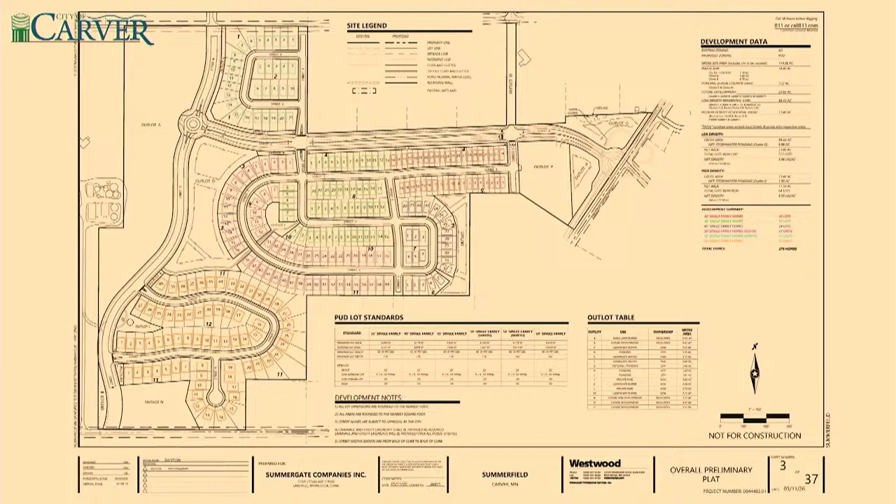On the screen now is the preliminary plat — the technical document showing where the streets are, where the lots are, where the outlots are, etc. There are several outlots throughout the project. The city will be taking ponding outlots primarily, while private parks and landscape buffers will be owned and maintained long-term by the HOA. So we'll be taking outlots for ponding, which is our typical practice, but some other uses will be held by the HOA.

Thinking through the PUD requests they have — the R2 zoning district is shown on top of the screen, and I've highlighted some areas they're requesting additional feedback on. The minimum lot area in the R2 district in our zoning code is 7,000 square feet, the lot width is 60 feet, and the side yard is 7.5 feet. As I mentioned, some of those lots are smaller — that 35-foot lot is obviously inconsistent with the 60-foot lot identified in the city code. The lot minimums have also decreased to allow for medium density on that first parcel as you enter the project. So the PUD request is for the minimum lot area to be reduced, the minimum lot width to be reduced, and the side yard setback reduced to 5 feet on either side.

We've seen that in several projects. Again, River Bluff Estates is a really compatible comparison to this project for lot width, side yard setback, and lot size.

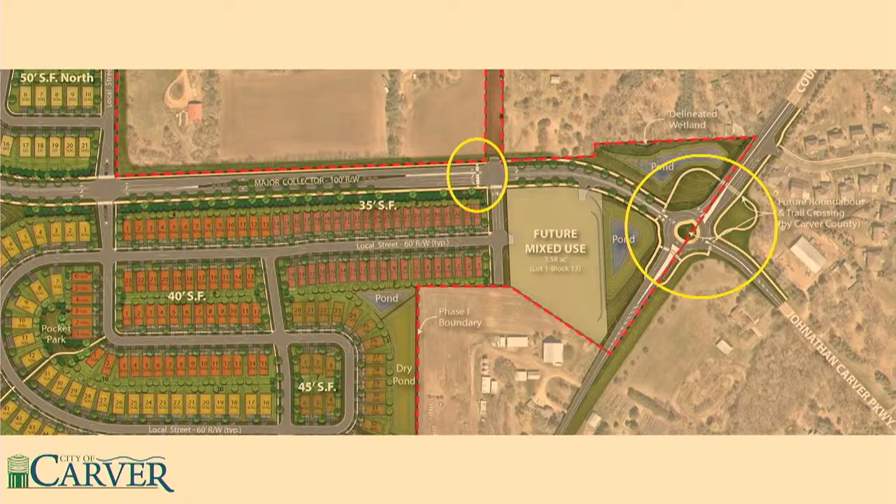Okay, correct, thank you. Now the landscape plan, which we've talked about a lot regarding buffering.

The street that comes in on the roundabout into the project is a collector road, so think about it similarly to Monroe, thinking about how traffic enters the system and travels, along with another east-west collector we'll see. There's extensive buffering along the Lennar lots entering the site, and extensive buffering in this area. This area is held as an outlot for additional buffering from a farm user and ag user that is planning to stay, offering some additional space. Landscaping throughout the development will be long-term maintained by the HOA in some key buffering locations.

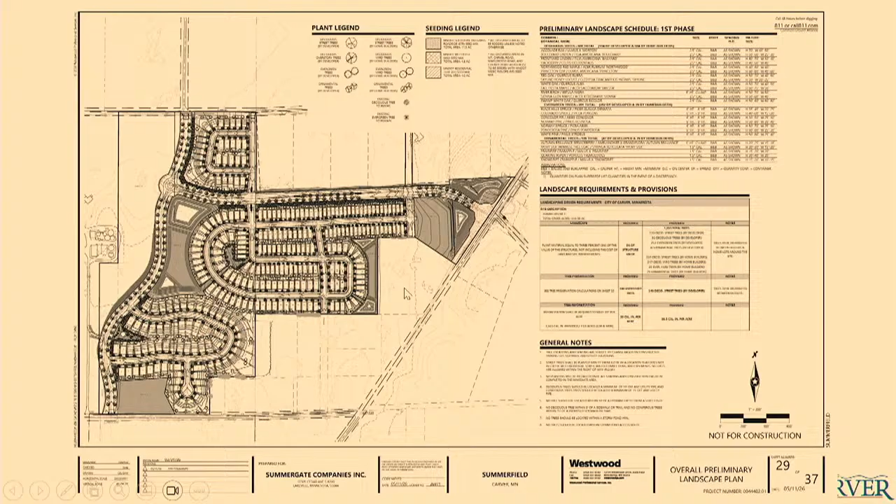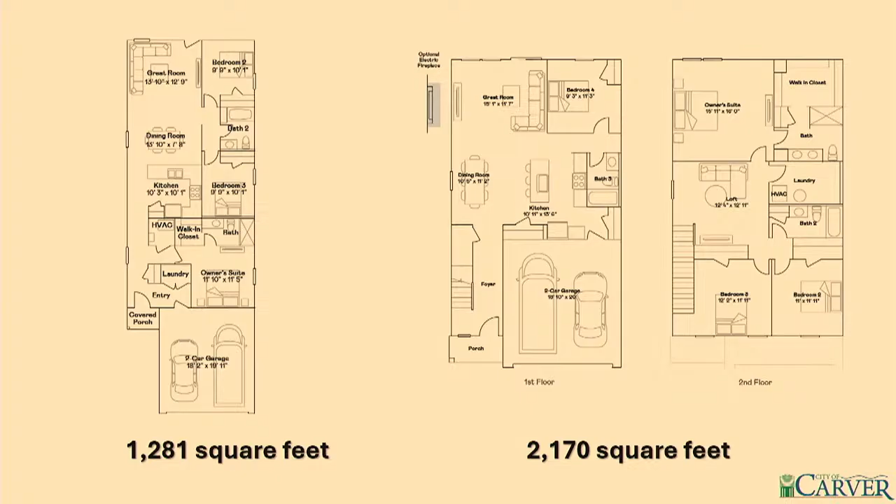Some samples of what the Lennar houses will look like, including that first property coming in that hits the medium density, with some different housing types than what we currently have in Carver. Here's an idea of what some of the interiors will look like. These are slab on grade homes, the smallest ranging about 1,281 square feet, and a larger product at 2,170 square feet—both Lennar products. And then the M/I Homes, very similar to what we've seen in Meadows at Spring Creek, for that development on the north and south portion of the west side of the project.

As previously mentioned, the Planning Commission reviewed this project at their June 18th meeting. We had 8 people at the public hearing, and I want to extend a thank you to them. It can be a little overwhelming to come in and speak at a public hearing, but it was great to get their information and hear what they had to say. It's always great to have a full room learning more about a project, no matter their stance on it—I hope they can always walk away with at least some more information.

So we received some questions throughout about the county road improvements. That was a big piece of it. Folks who have historically lived in this corridor for a long time asked specific questions about how their property will be impacted. Timing of the project was big. Some clarification about what annexation looks like, township versus city boundary, and then drainage, especially at the northeast corner of the project boundary, as you enter the site from that roundabout. We have a slide coming up and I'll toss it to Aaron after this.

I would like to note that the Planning Commission recommended approval of the preliminary plat and rezone on a 5-0 vote.

Yeah, so I just wanted to elaborate a little bit. One of the concerns we heard, which was a really nice comment, is that this project drains off-site, situated at that northeast corner of the development. There's a series of ponds that the water drains through as it moves through the site, and ultimately the discharge location off the property is in this northeast corner.

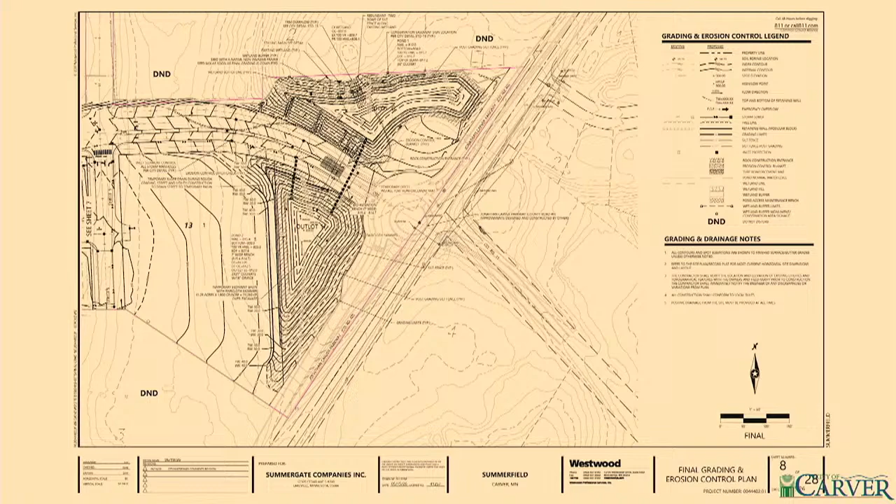Right, so. Thank you. Yep.

So again, tonight there are three requests before you: review of the preliminary plat, rezoning, and then that early development agreement for grading and utility work due to pipe depth. That's so hard to say. Pipe depth. At this point, Casey, do you want to join us for the conversation? Will you introduce yourself?

Hi, good evening everybody. I'm Casey Walschlager with Summergate Development.

Thank you, good evening again. I'm Casey Walschlager with Summergate Development. We're kind of glad to get to this point where we're finally seeing maybe the start of things. The project has a lot of different elements. She brought up a number of them, talking about the different size lots.

One of the things that's really happened with the Met Council is, it used to be where you could have these kind of yellow zones and orange zones, and as long as it all averaged out and met that number, everybody was happy. Then the council changed the plan and said that orange zone, literally down to the inch, will be that zoning, that size lot, or whatever.

They've made it a lot more difficult to use common sense and just make sense of plans, so everybody's changed their philosophy a little bit. Our plan has gone through many iterations over the last couple of years as we've worked with staff. Originally we thought we'd just do townhomes in one section, then we thought maybe we'd average it out, because that was how it was done. Then Met Council changed their philosophy a little bit over the last 18 months, and we reverted back to making sure the medium density area meets medium density qualifications, literally down to that section.

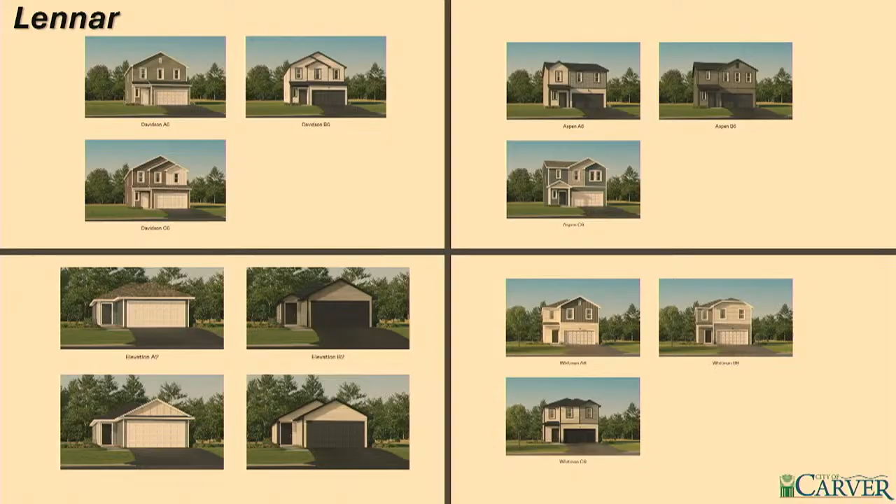There isn't a park nearby, how far do we guess that park is away? Those are really small lots. If we're looking at probably small starting families, is my guess. Possibly, anyone of course, empty nesters could have one also, but it doesn't seem like there's a lot of room to have a pet, have your kids be outside. It just seems really packed in tight.

Even behind the house? So the park is slated to be in this general location here, just further south. Is it this one? Yeah, right below the red stuff. Yeah, right there. So, something to know: there are 2 pocket parks in phase 1, and then the larger park would be served for those folks via a trail system. So a couple things to note, but comment well heard.

So when we're looking at this, is that acceptable to us, to have that small of a backyard? As a development that's going in, are we okay as a council with that, as staff with that? Again, I like the smaller houses, I like the smaller footprints, it just seems really small if you're looking at the length of the house, and then to think about having even any green space out back.

I'm okay with it just because of the variation in product, and this is only one phase. We're not talking about an entire development of 35-foot lots. This is just one piece that offers a product that might come in at a price point that gets somebody to Carver. So I'm okay with that. That is the buyer's choice.

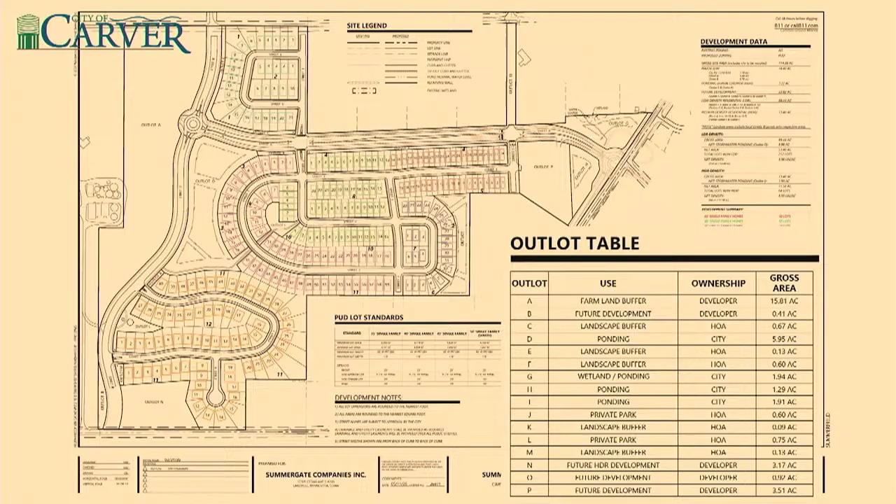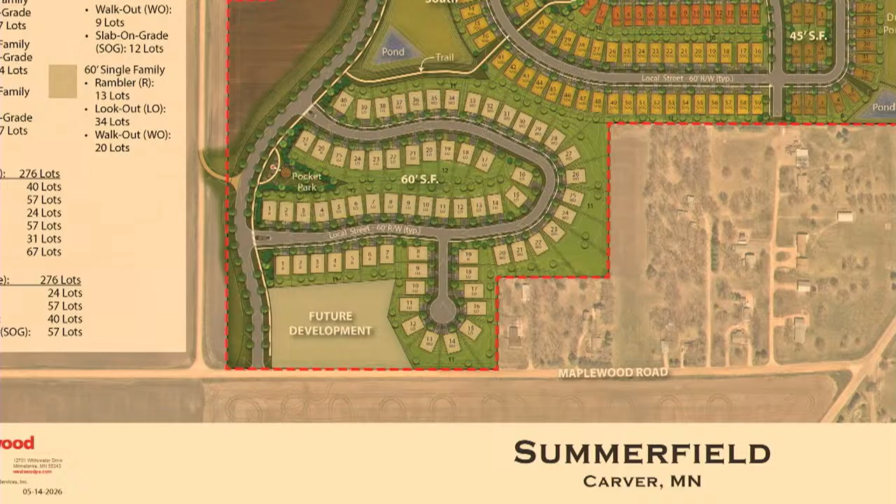So those are the building pads that they're showing, right? So there could be - if you go to the illustrative one, if you wouldn't mind. If you can zoom in, on the bottom cul-de-sac. Can you zoom in at all more, or is that as far as you can?

Okay, so when I'm zoomed down on mine, looking at it - this is a really big sticking point for me because I think we're doing a disservice to the future neighborhood there. We've already seen the complaints, we've already dealt with them on one that we've already done, and it has been nothing but issues. Parking.

I have a different view of it. I'm comfortable with what's in this concept of the plan. Definitely Lorraine Court - we have residents who are now long-term residents, and that's... they've been residents for a long time.

I might pronounce it wrong, but I feel like that cul-de-sac is a bit of an anomaly because I don't hear about it as much on other cul-de-sacs. I feel like it's just a small percentage. It's unfortunate, but there's a unique story in that neighborhood, and in so many of those homes - I live within walking distance, so it's a little different. But as far as how large their family is, what their occupations are, that's playing into the dynamics.

I've also personally parked up there, and there are numerous spots that are not long enough to fit a car length. Then those people shouldn't park there. They need to either double up in the driveway or go for a longer walk. Right, but then it just pushes it, it just keeps pushing it down.

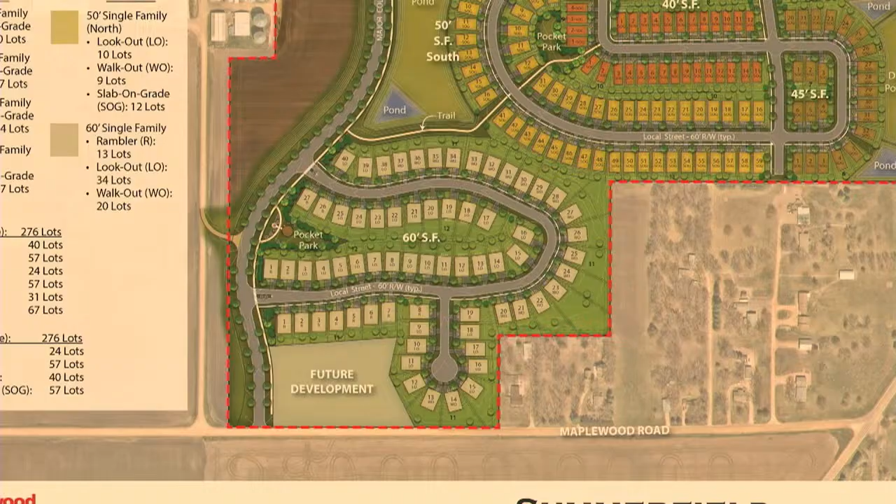So all you're going to do is push it down the street and overflow it in front of the next homes. So you'd be fine on your cul-de-sac or street having all that parking now come directly in front of your house? You'd be okay with that? That's fine with you, only because that's the only option? I don't think so. Just imagine, Lori, if on your quiet street all the parking was pushed out and now it's right in front of your house - would you be just fine with that?

Yeah, even if that might happen with the plan, I wouldn't adjust the plan just because of that. I would be annoyed and inconvenienced by that.

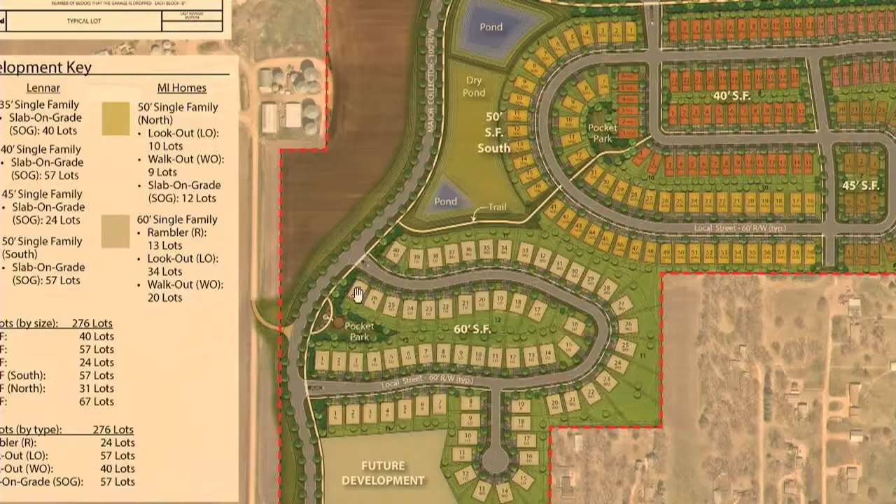It's not always developed. Like we did one once before in a project, and everybody wanted it left woods, and all we had was the trail cutting through it, and it ended up being woods because it created some privacy inside that area. But then you have the woods, so everybody has a trade-off on these things. But there's not a specific great big plan for the pocket parks. They're mostly just to be open space for the kids to play in. I mean, that's how we kind of looked at it.

Thank you. Yep. That it? Yeah. Okay, I was really thinking I was going to come up with another question or something, but just those two. Eric? This is nitpicky.

These kind of things make me nervous, these little islands here. I have this on my street, and if somebody parks right there, no emergency vehicles getting by. Are we making this wide enough so we've taken that into consideration?

All right, 20-foot face to face. We've learned from a previous mistake. Okay, all right, good enough. And Andrew and his team have voiced the same concern for plowing and such, so we'll make sure that's addressed.

Thank you, so nitpicky. Is that little thing needed?

Well, I mean, that's usually like where kids wait for the bus and stuff like that, so I get that. Then there's the beautification aspect for it. They get something for their money for the HOA.

Then yeah, the intention is to put a little monument sign on the common shared space, if it means anything. The intention is to put like little neighborhood monument signs.

Okay, yeah, well, if you hadn't kind of figured out from the design, the idea is to create neighborhoods inside the neighborhood again. So the one we're looking at right now, there's an entrance, kind of the north and the south entrance there, and there'd be some type of monument sign sitting inside that would identify it.

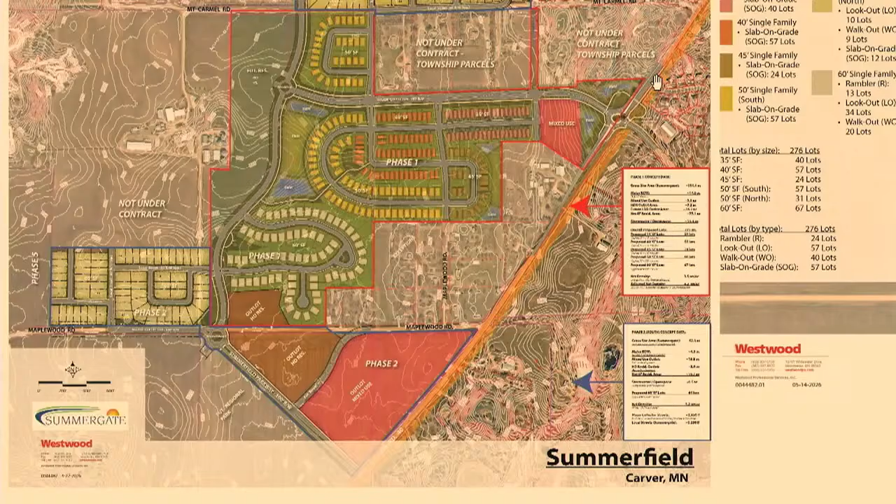Fantastic. I love the housing variety. I think we've all had our own comments on this, but I think that this is a type of house we haven't seen in Carver yet, with kind of the really the smaller sized standalone townhome.

I didn't see any, but are there any private streets in this development? Fantastic. The trails will be city maintained, correct? Okay, except for some spaces that move between like the pocket parks, and I suspect we'll work through that.

All right, that's all I have. I have one more question. You brought up the lower pocket park. So Erin, when I'm looking at this, and I'm looking at the lots, so we've got 5, 6, and 24, 25. Where, if you can zoom in a little bit on that, where that comes to that little point, does it make sense to extend those lots?

Yeah, can you make that any bigger, enlarge it at all? Oh, can you move the hand? Thanks. Just because there's like these little teeny pieces in here that we're going to have to maintain. Does it make sense to just touch those lots completely, like 24 and 6? Is the association going to maintain those?

Sometimes when you see the park, it's one of the things we have to hit open space requirements by, so that's your square footage you need. You can't just fill it in with lots. So, trust me, I buy into what you're saying, but...

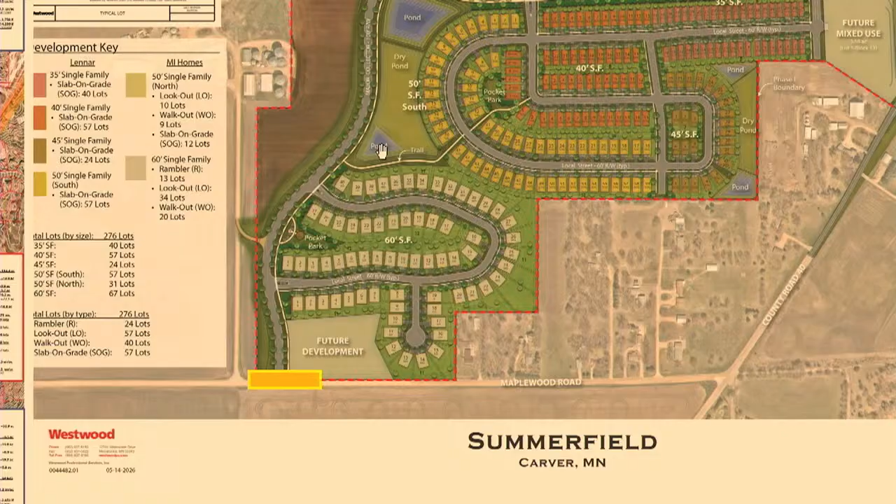All right, we have a few motions we need to do at this point. I'll make a motion to adopt Ordinance 04-2026, rezoning property to R-2 PRD to accommodate a subdivision proposed to be called Summerfield. Motion by Pershman, second by Pasco. Any further discussion? All those in favor say aye. Opposed, same sign. Motion passes.

I'll make a motion to adopt Resolution 136-26, approving preliminary plat for the first phase of a residential development to be known as Summerfield by Summergate. Motion by Sarah, second by Pershman. Any further discussion? All those in favor say aye. Opposed? Motion passes.

I will make a motion to enter into an early start agreement by and between the City of Carver and Tollefson Holdings LLC regarding Summerfield. And I will second that just to get in here. We've got a motion by Pasco and a second by Johnson. Any further discussion? All those in favor say aye. Opposed? Motion passes. Congratulations, Casey.

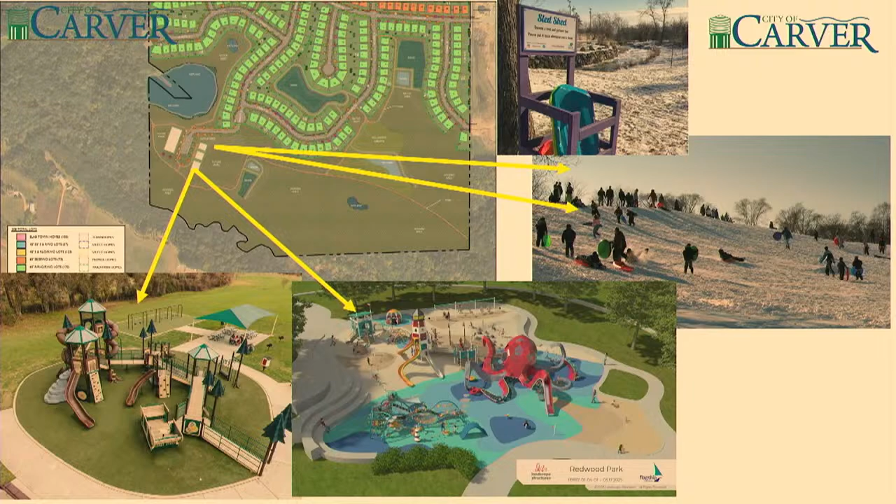Where is that? Is that in Minnesota? It's in Apple Valley. It's big in the mom circles right now. Yeah. Oh, yeah, that's why.

I'm thinking, like the Chutes and Ladders Park. Yeah, exactly. That was hitting some of the high notes that folks were looking for. Again, some different park features, some more reflection space.

So we reviewed that information. I asked, how do you feel about it? Overwhelmingly, people were good with the design of the park. Nothing major coming out to say we need to do XYZ here instead. So that would be the general location, barring any conversation tonight, that will move forward with DR Horton in the enclave.

The next conversation we had was the Summerfield Park. So this is what's included in the Parks Master Plan, again developed in 2018. But as we start to think through it, I think something that we need to have a discussion on at a staff level, Planning Commission, and City Council level, knowing how expensive this park could be, with some priorities that we have outside of the specific parks.

I also personally think that a stadium field is great for a certain number of users, but it's not a super broad use for most folks. Just knowing the amount of maintenance that they can take and some ownership that folks might have, which is great, but a use that 276 families probably couldn't go use on a daily basis if this was their neighborhood park.

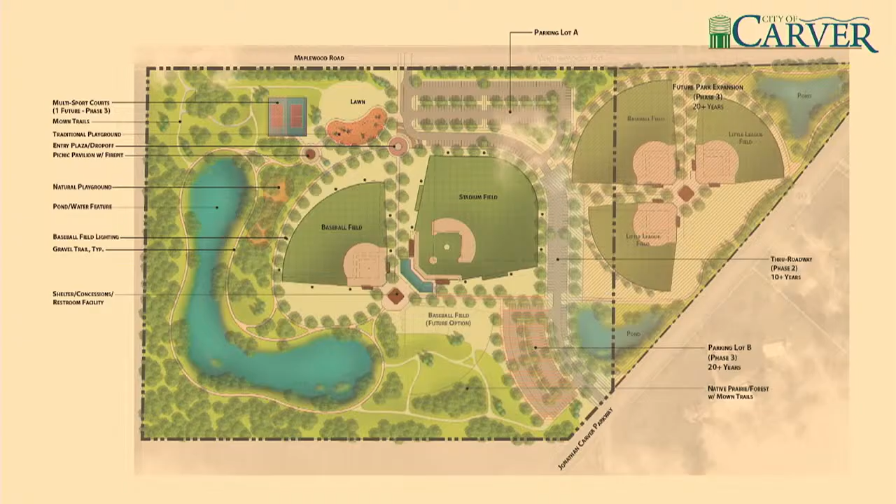But thinking through the acreage of it, it's a huge park. We can work with Summergate and figure out if we want a smaller area reserved. Right now it's 38-ish acres, and that alone at $95,000 per acre is $3.6 million. So thinking through what that does to our park dedication dollars, it's 768 lots. Again, tonight you looked at 276, so essentially taking that by 2.5. So phases 1, 2, and 3, if they were that same size, phases 1, 2, and half of 3 would be just for land acquisition for the Summerfield Park.

And then a stadium level field limits public park use, heavy investment with low engagement use, high maintenance expectations, and it's a lot of money used for parking. Phasing will be important. We don't have to buy into this park straight at 38 acres with those uses. So we also talked about investing in the Summerfield Park with a stadium level field would delay the landing, just knowing how much construction would cost for that level of improvement.

You've all seen this slide at a couple of meetings, talking through what this looks like when you come off the Merriam Junction Trail, a pretty significant commitment and project that was done by Scott County and Carver County.

So thinking through what this looks like for folks who have maybe never been to Carver, this probably isn't the warmest welcome. These are some previous versions we had of the landing, with a large community space, potential stage for performances. I heard overwhelmingly that folks are passionate about good bathrooms here, beyond what we typically offer like a biff or porta potty, and then a water feature adjacent to the levee project.

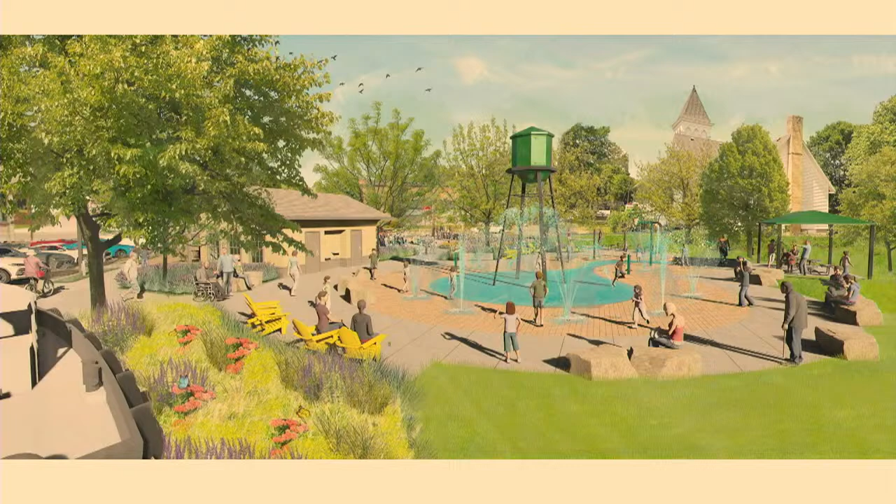So some examples of what that water space would look like, understanding that it's the historic downtown, if it's a water tower feature. We talked a lot at that meeting about what a splash pad is versus a water feature that could be used as an art installation or a space for gathering.

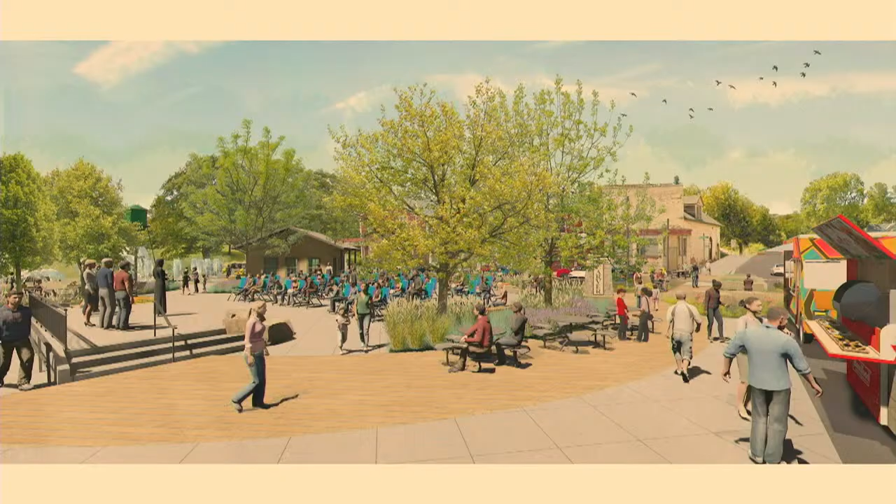Different views. So this would be standing a little bit further east, like Riverside Park would be behind you looking towards Getaway, so this is the Getaway building. Space for food trucks, casual seating, the performance space, and then a community pavilion.

The entrance into the park, pulling some of our common themes from the JCP project with that monumentation and plantings. This was shown at your strategic plan.

This was a version we talked about again at the strategic plan with the Merriam Junction Trail. A lot of these themes come through in the plan we have, so looking for some additional feedback if this is the continued direction—pavilion space, stage space, water feature that could be used throughout the day and night in the downtown.

Again, general layout. I wanted to revisit the previous version that just mostly featured the water feature. Throughout the park we've made some pretty significant changes—the water feature gets pulled back, becomes less of a focal point with some additional uses. So version 1, version like 8 probably, but just wanting to show the conversation we've had articulated in the plans.

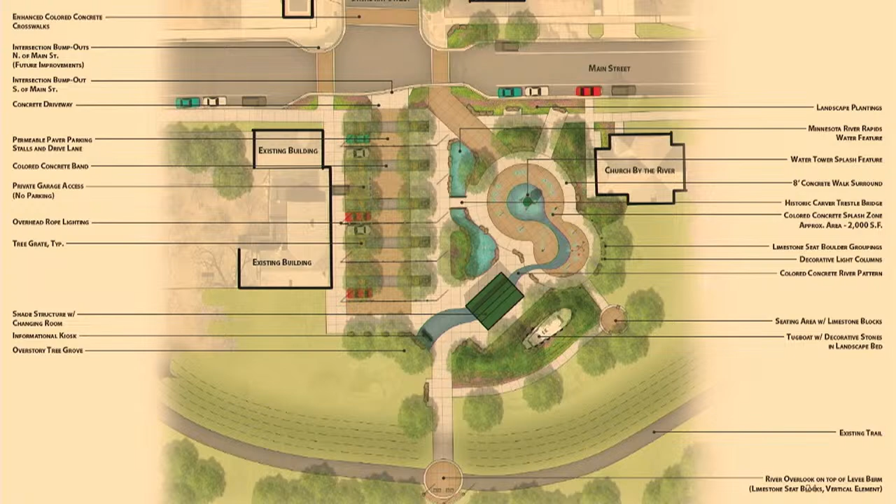Yeah, the importance of opening up the bridge with a connection to downtown. So we talked a lot about what needs to change about the landing. We've seen a lot of versions of the plan. This was probably version one that got routed, and it did look like it was only a water feature, or what folks were calling a splash pad, which I can understand. But looking at what we've changed in the plan, it checks some more of the boxes folks are looking for — the food truck space, some casual seating downtown.

The farmer's market, if it continues, would move to this space in the parking lot with some cute lighting, etc. So the conversation was had too of what do we need to change about the landing. Overwhelmingly, it was about how we talk about it and think about it as a community gathering space, as opposed to a splash pad water feature — offering some additional uses there coming off the Merriam Junction Trail.

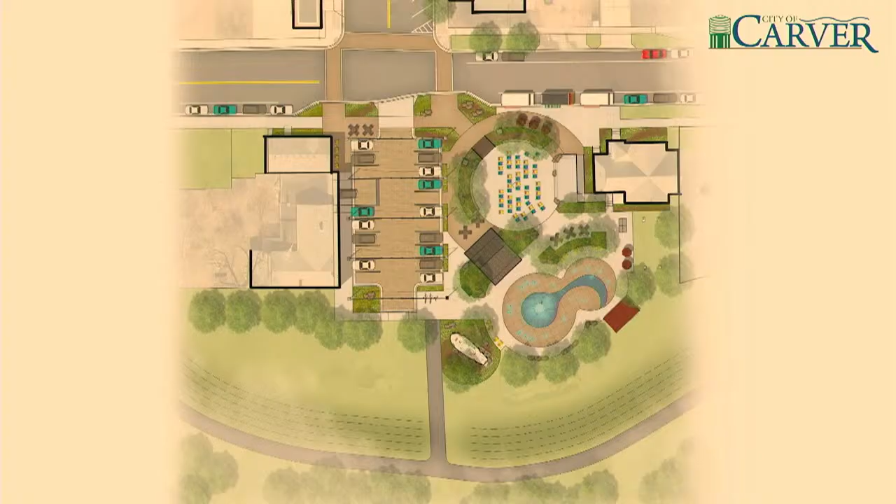And then we talked about the zoning code, which is probably the most boring part of the meeting. It's been on my to-do list for a long time to do a full update of the code, but that's not likely to happen with the amount of development and other work we're seeing. So we called out some important sections: accessory dwelling units (ADUs), the gateway commercial district — protecting land directly adjacent to county roads and major corridors in town — design standards, formalizing design standards in commercial and industrial zoning districts so we can have more feedback on what a building needs to look like when it comes in for concept plan, and then fences in general — that section of the code is really tricky, so it would be cleanup of that general section to allow folks to clearly understand it.

Haven't you done some of this work already? I don't want the work to go to waste — is it basically just on these topics, or were you starting top to bottom? I have some more work done, but it's something I can let go of. Okay, but I feel like it's also gone through the planning commission — some versions of it, yeah. And I can pick out some spaces where we got to a point where they were saying yes, thumbs up, okay.

As we work through some of these sections, like the definitions will need to get updated because we'll need to define what an accessory dwelling unit is. So there will be work throughout the code, but these will be the big pieces of it.